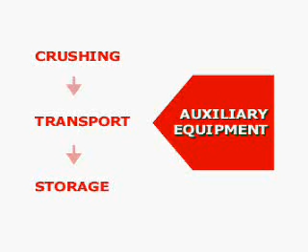Three fundamental circuit sections, crushing, transportation, and storage, consist of equipment components basic to every primary gyratory crushing circuit, and auxiliary equipment components that aid the operation and deal with any special requirements. In the crushing section, there are two main components.

The first is the primary crusher itself. At Antamina, this is a 60-inch by 89-inch gyratory crusher. It is a direct drive machine as opposed to a belt and pulley style of drive common on small crushers. The motor is provided with a soft start feature. When the crusher is started, the motor automatically ramps up to normal operating speed over a short period of time. This serves to cushion and protect the electrical system if the crusher is started while fully loaded with rock.

The second component is the surge pocket. The capacity of the pocket at Antamina is 480 metric tons, equivalent to two 240-ton truckloads. This section has several items of auxiliary equipment. A hydraulic rock breaker gives the operator the ability to dislodge or break rocks that may be blocking the crusher opening. Between truckloads, the operator can use this machine to move rocks into the crusher that may be hanging up in the stone box.

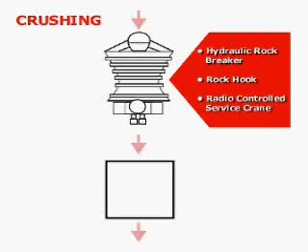A radio-controlled bridge crane serves a number of purposes. It is essential for maintenance, but operators sometimes need it when using the rock hook. The rock hook, in conjunction with the crane, backs up the rock breaker. It is used less frequently, but sometimes when a piece of tramp metal gets wedged in the crusher, the best way to free it up is to pry it up. The rock hook is designed specifically for this. When using the hook, always remember there is a danger of cable whiplash, so it is important to ensure that all personnel are cleared away from the crusher area before the hook is put under tension.

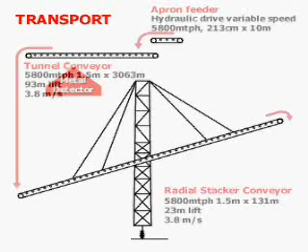In the transportation section, there are three main components. The first is the apron feeder. This feeder is an apron type since the belt consists of steel pans linked together. It is driven with a standard variable speed hydraulic drive that operators can adjust. The feeder, 2 meters wide by 10 meters long, is located directly under the crusher surge pocket. It transfers crushed rock onto the tunnel conveyor at a peak capacity of 5,800 metric tons per hour.

The tunnel conveyor is 1.5 meters wide by 3,063 meters long. It rises 93 meters, travels at a speed of 3.8 meters per second, and is the second component of the transportation section. The third component in the transportation section is the radial stacker. The radial stacker is a special piece of equipment because it's both a conveyor and a distributor. The conveyor has the same carrying capacity as the tunnel conveyor, 5,800 metric tons per hour. It is 1.5 meters wide, 131 meters long, rises through 23 meters, and travels at 3.8 meters per second.

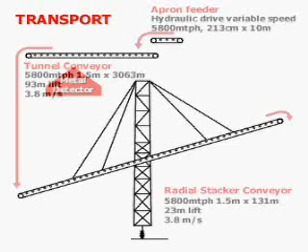The one piece of auxiliary equipment in the transportation section is a metal detector on the tunnel conveyor. The metal detector protects the downstream radial stacker conveyor and reclaim conveyors under the stockpiles. The associated transfer chutes and draw points are critical locations where tramp metal can cause real problems. Detecting and removing tramp metal before it can get to any of these points prevents chute plugging and the possibility of belt tears.

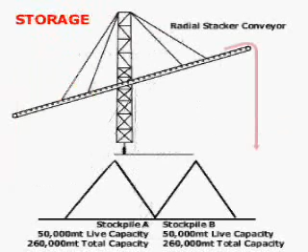When metal is detected, the detector marks the spot with a spray of paint and activates a horn and flashing beacon. The conveyor motor is automatically stopped, and the conveyor is allowed to coast to a stop. It is up to the crusher operator or his helper to lock out the conveyor, locate the metal, remove it, and restart the system. The components in the storage section include the radial stacker and stockpiles A and B.

Some ore bodies are metallurgically complex and cannot be optimally treated with a single concentrating process. For this reason, concentrators may be designed to treat different ore types, and these must be segregated from each other before they enter the mill. The stacker accomplishes this, distributing the product of the primary crusher received from the tunnel conveyor onto one of two stockpiles. Under each stockpile are reclaim feeders, transferring crushed